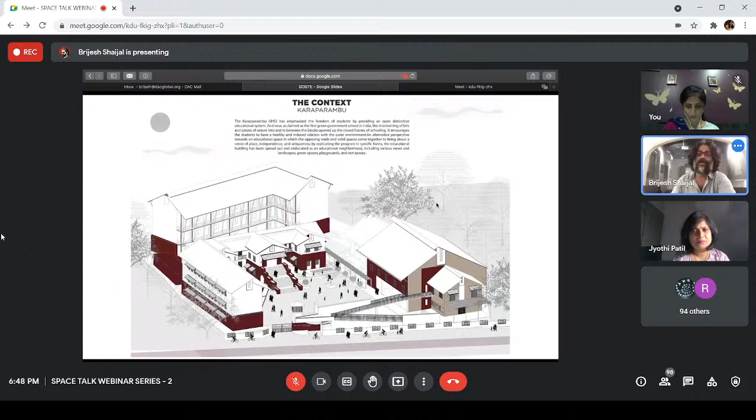Students used to sit outside, using that amphitheater as well. And it's a very small campus where you can see a big courtyard in the middle, and this is a ramp which we designed to approach the upper levels. In the backside there is another courtyard. There are multiple courtyards we connected, and each courtyard, when there is an event, is used for different purposes.

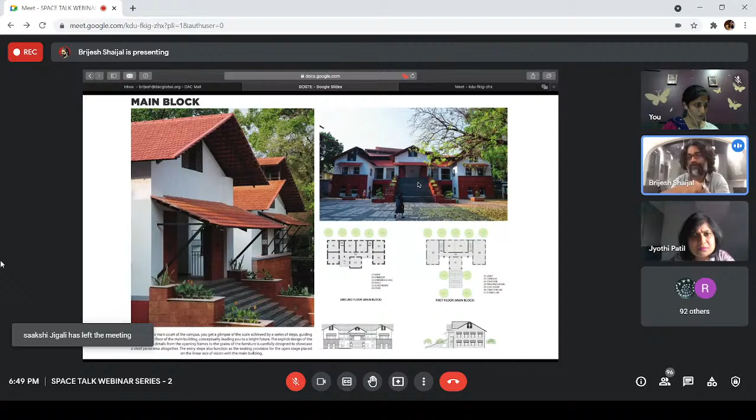This was one of the elements we are talking about, that staircase we added. This gives a feel where that approach itself makes a lot of difference for the students.

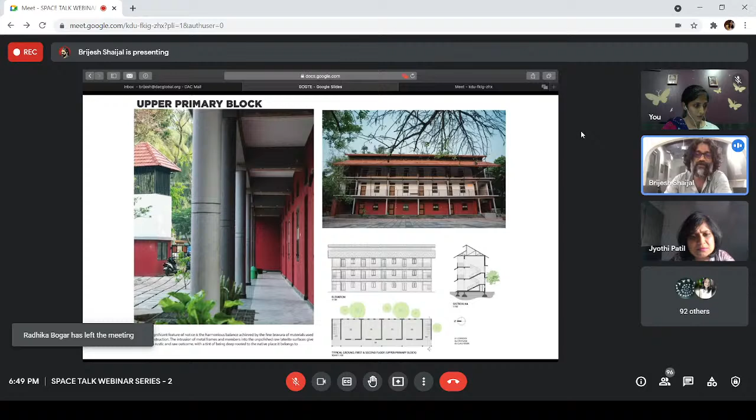All the corridors we treated - these were the old buildings, and we just changed the face of the building, bringing a similar character to the entire campus. Those overhanging roofs and all we added.

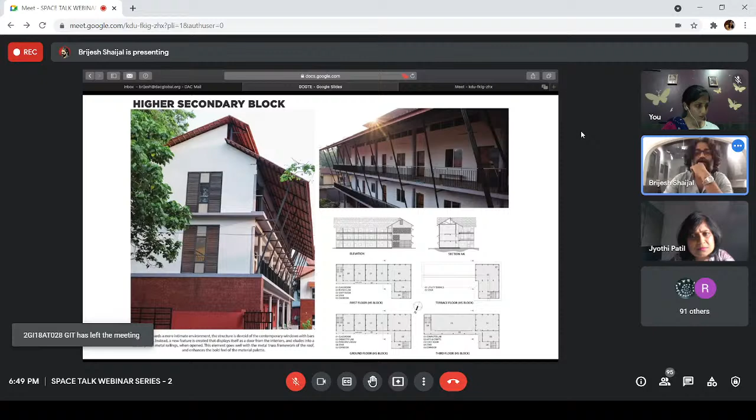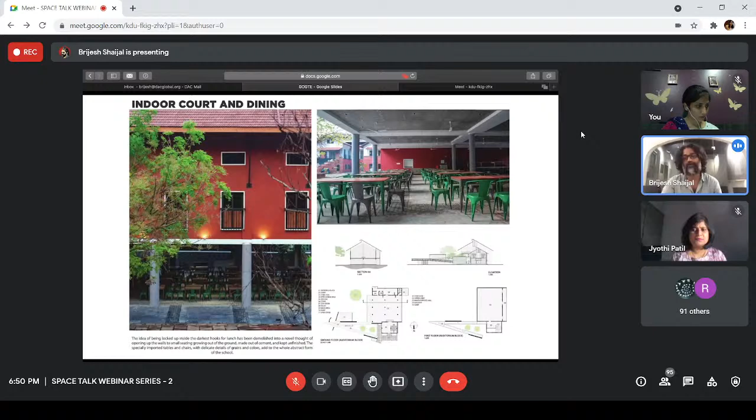That building was a little older block which we converted, and we added these kinds of windows which, once opened, look like a balcony. We kept the dining area and all open from both ends, facing the western area, so that the wind allows to move through the entire campus.

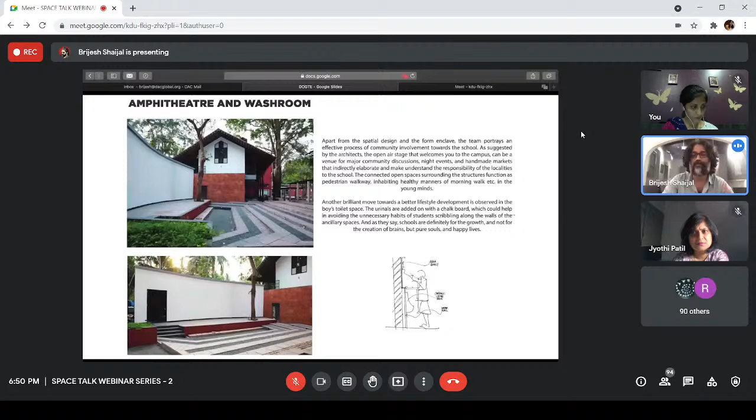This wall you see is in front of the ladies' toilet, and in the ladies' toilet we also added a courtyard. In the gents' toilet, along the urinal, we also added some blackboard, because the earlier trend was that students used to draw on top of the walls. So we provided a dedicated area for them to draw.

I'll just introduce my office - that's DAC, Design, Art and Culture. This office functions in an old courtyard house, and we took this house around 4 years before.

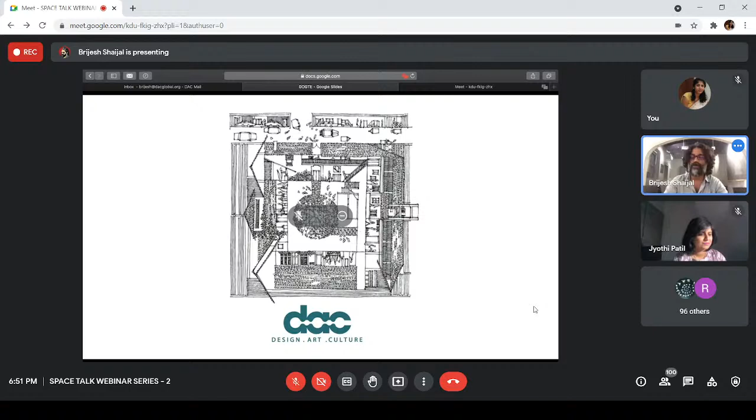We call it Sarpandika Shala. It's an old Gujarati settlement having a courtyard, where they used to have their business on the ground floor and live on the upper floors. So this building was more of a retrofitting project, and here we added lots of elements to it.

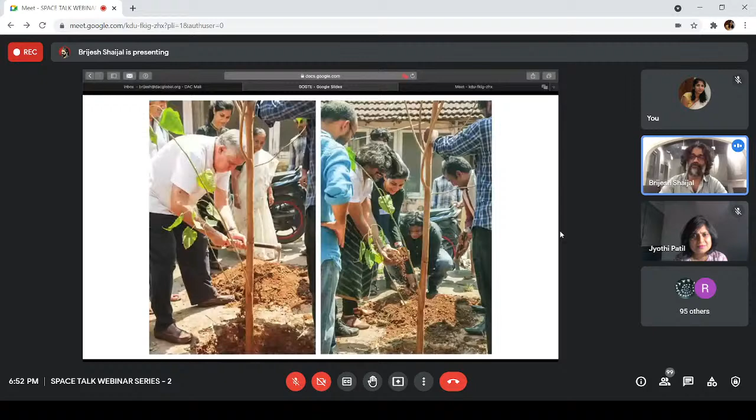That tree was our beginning. Then we changed the entire facade with all the old bricks and old windows and doors we added, and lots of columns we added in the inner space.

These are a couple of our meeting spaces. As part of the courtyard, we added some corridors and stuff like that. This is the peepal tree now - within 4 years, it became a huge tree, giving lots of shade.

Lots of birds keep coming now, and this always gives us lots of energy. Most of our meetings also keep happening in this space. Every Wednesday we have a music event, an open mic - people come and talk, and then they perform.

So these are a few of our event shots. We also did a couple of shows and a flea market and all here. So that's more about engaging with people.

So the idea is we want to bring a community space here to connect with like-minded people and interact. We also, from Design Ashram, connect and work with the largest literature festival of the country, which happens from here and in various venues in Calicut.

We did a Sufi festival and flea markets and lots of concerts. All the books here are sponsored by lots of readers and writers, and we have a hall which we sometimes use for presentations, movie screenings, and art. It's also converted into an art gallery.

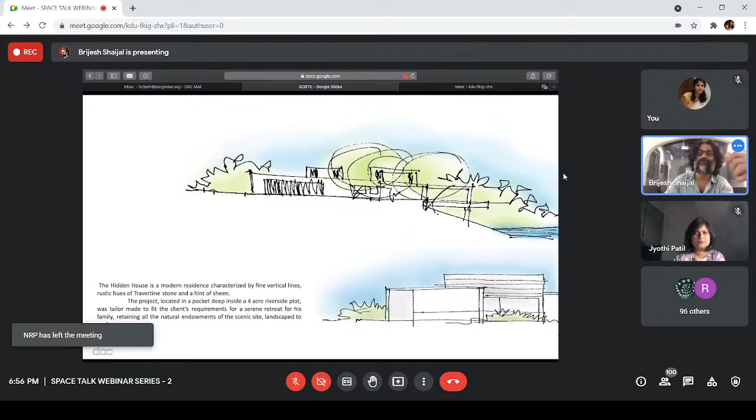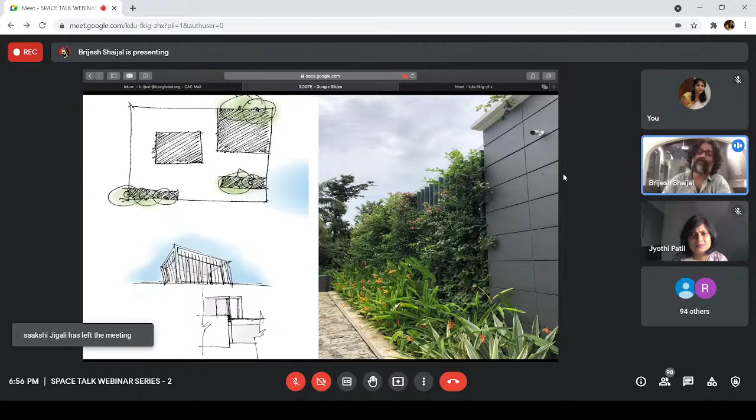This was the approach - we raised the entire plot a little bit so they can get a river view from there, and we kept a distance because of CRZ regulations. We started with the porch you can see, and added some metal pergolas for the creepers to grow. After a year, the entire pergola is covered with green.

In all our projects, we work mostly with greenery. These are some of the courtyards within the house, and this is how it looked from the front. This is the inner courtyard, where the roof is slightly raised, and we are taking light from the sides because in Kerala we have heavy rain.

Sometimes we won't be able to manage the rain and protect the floor area. This is how you look into the top of the courtyard, so you can see the light coming in from all sides.

This is how it looked from outside too. Some other angles of the house. This is from the lobby - you see the river, and from a distance you can see the river on the edge. The same lobby.

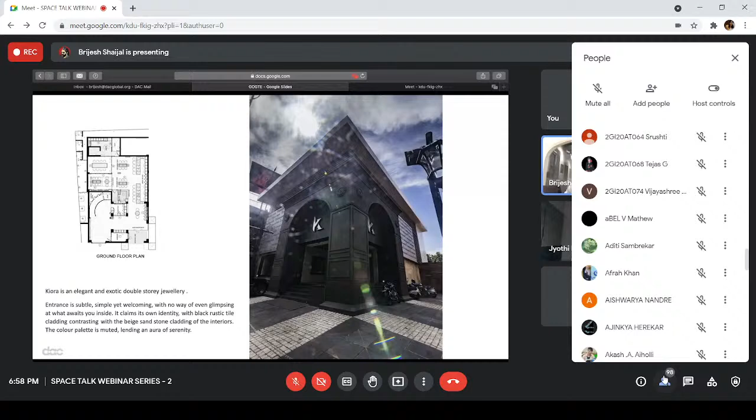A few detailings, and this is one of our interior projects, also in Calicut itself. It's got a mix of classical and contemporary approach.

We wanted to bring more richness to the space, but tried to use more natural materials here - you can see sandstone treated on the wall and wooden ceilings, and a few different areas. This is a bridal area.

Even the lights we keep designing in all our projects - not every light, but a few. These are like rice bowls we converted into lights, and a few stones we used for lighting.

This is how the staircase goes up. A few more - this is again the stone onyx we used as a lighting element.

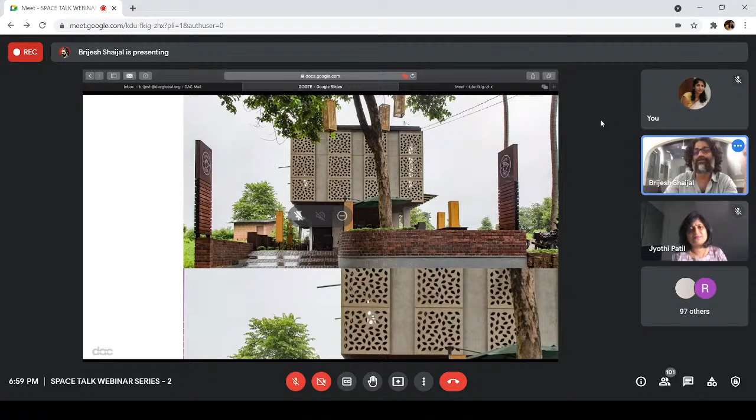Another project - it's a coffee shop we designed near a forest area, called Kappa Cafe. The concept was that in the evening the entire building needs to shine, so we put lots of leaf-designed cuttings on the cement sheet, and designed these evening glow effects.

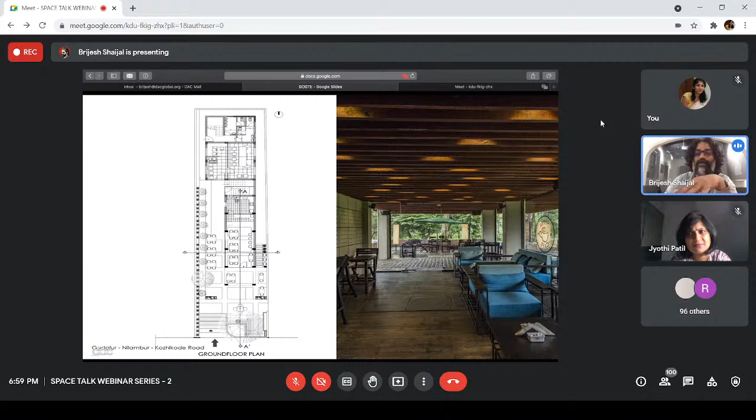This is how the interior looks. It's a very small coffee shop, and we kept mostly one side as the entry open. It is all designed within the framework of a typical commercial building, and we converted it like this.

Now I'll get into the topic, which is more on the social responsibility of all the young architects and students.

In Calicut, IIA, we are one of the very active IIA centers in the whole country, and I was the last chairman for this center.

Even before that, we used to work more on public projects on a pro bono basis. Our idea was that we need to give design to a human being at every phase of life, from birth to death. So it starts from Amma Thottil.

That's one project where they can help these people. There are lots of issues with the social system where babies are thrown somewhere and get killed. So the Amma Thottil project is where they can bring the baby to Amma Thottil and keep the baby on a cradle, and the hospital will take care of it. The person who gives the baby, no one knows who it is. That privacy is kept. That's the kind of project Amma Thottil is.

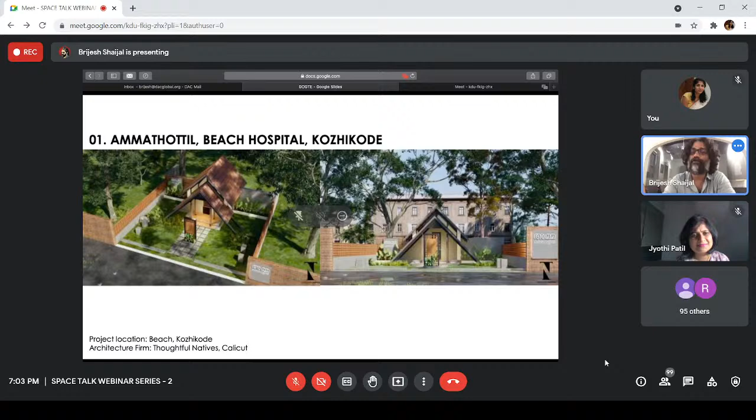That's the Amma Thottil project. These are a few schools - this one within Calicut, and another school. You can see more of the locally available material, that's laterite, in all the projects, because we don't want the project to look like it's from a different place. We always work on the context. This is the school which I showed you.

And this is a small house and gallery we designed for an artist. She is an aged artist, and she didn't have a proper house, so we redesigned her entire house and gave her a gallery to exhibit her art.

This is another project called Samudra, for the fishermen community. We designed and built this. For a 100 rupee fee they can conduct their marriage functions there, whereas if someone else is using it, they will have their own charges. But for the community, it's almost free - just want to keep that 100 rupees as a figure. Various events keep happening here. This is a completed image of that.

And we do a lot of beach development projects. One project we did is Freedom Square, which represents one of the freedom fights - this place had a huge gathering, so it gives that history. This is the Freedom Square project.

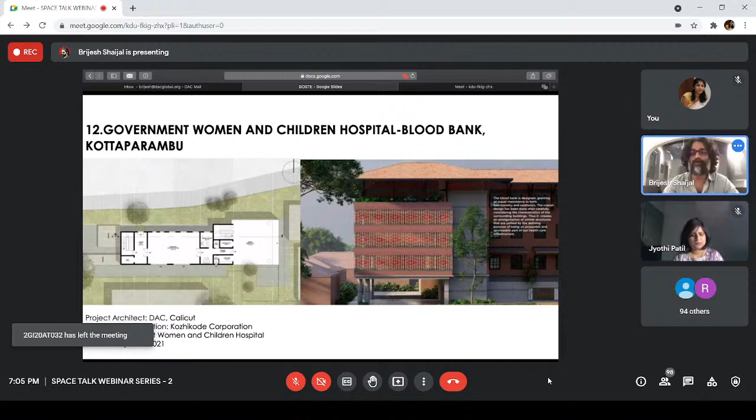And this is another project we are doing, the Women and Children Hospital Blood Bank. This is just the blood bank block - the entire campus we are designing. This is just an initial stage of the design.

For flood victims - last time Kerala faced floods in consecutive years - for the flood victims we are doing lots of residential projects. Presently we are doing around 56 houses in one Wayanad area.

The lower level will have the fish market, and the upper level will be a restaurant. People buy the fish from there, and they can give their own fish and get it cooked on the upper level.